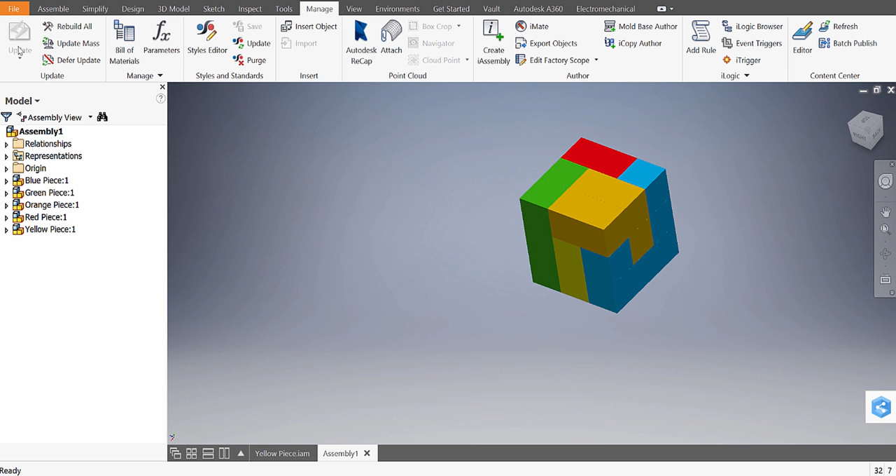The puzzle cube is complete. Hopefully yours is as well. Let's go ahead and move on. We're going to go to File, New, New. We've completed our parts. We've assembled them. Now we're on phase 3. We're going to put them on a drawing file and create some quick orthographics. Go ahead and start with a standard.idw. It's going to open up a file that looks like this.

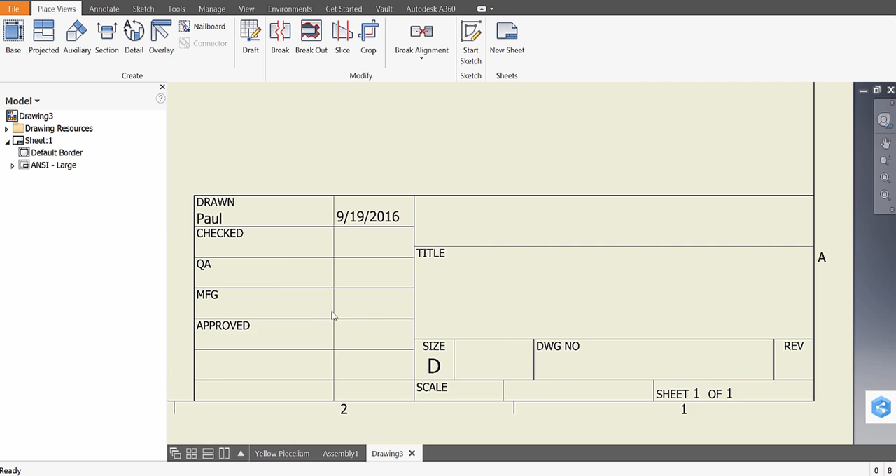I call this sheet of paper a title block, even though the title block is referencing this area down here, which is where you're going to be able to put down some information. It's pretty self-explanatory, and if you want to fill that out, you can. Otherwise, we'll fill that out for another project.

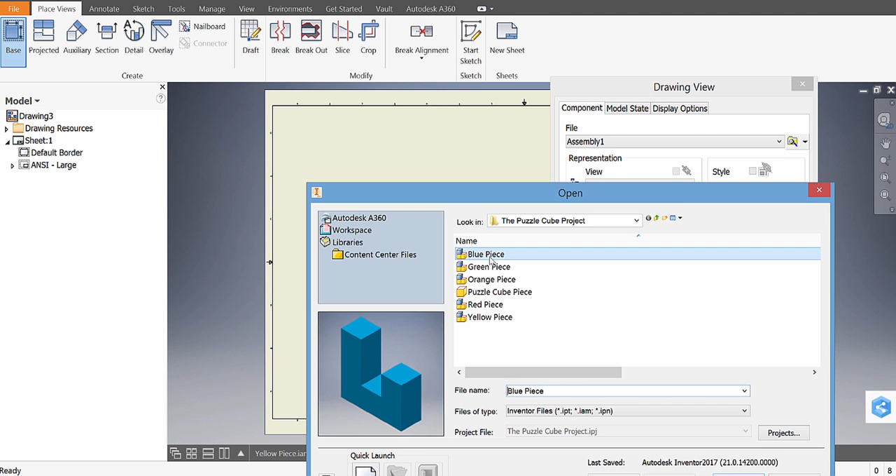What we're going to do is go to Base, and you're going to have a screen like this pop up. I want you to search for one of your pieces. So I clicked on that magnifying glass, and I'm going to start with my blue piece. So I'm going to double click on that. And it should appear on your screen, really small compared to your paper possibly. So if it is small like that, I want you to change the scale of the object from a 1:1 to perhaps a 2:1. That's looking good.

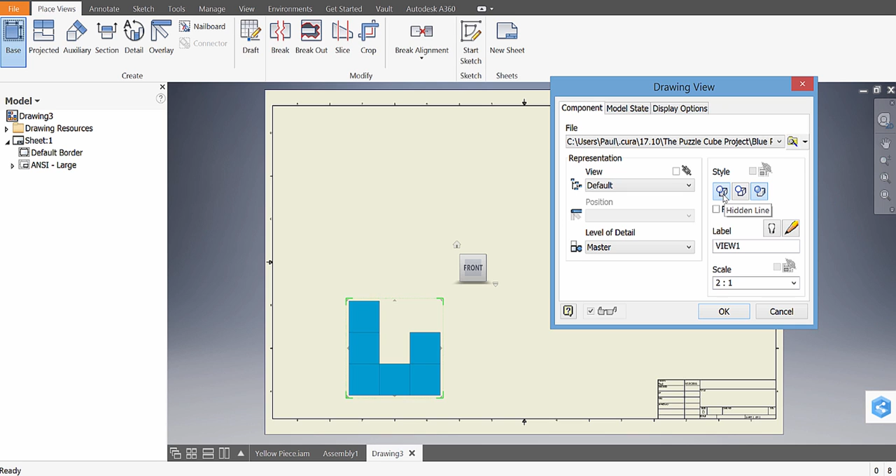I want you to make sure that the object is shaded. So left click on that, and also make sure hidden lines are on. That's just going to show you those dashed lines, and make sure both of these are selected. Okay, I'm going to move this out of the way because it always gets in the way. I'm going to kind of grab this and move it back up here with the left click.

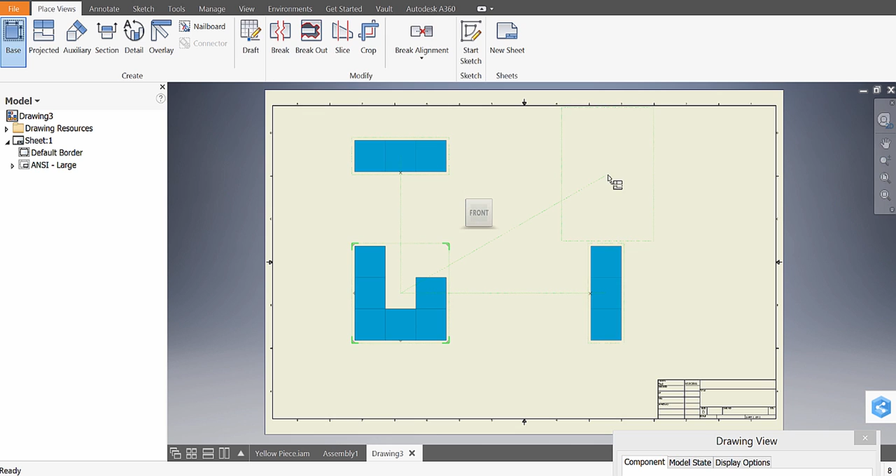And then I'm just going to go up, left click, go back there, go to the side, left click, and then go up here, left click, go to the center, right click, and then click OK. And if you do that in that sequence, you're going to create an orthographic, and not only that, you have an isometric in the corner, and everything is aligned perfectly with the other parts. So that's pretty cool. Typically in the world of orthographics, we also like to dimension things, and we haven't talked a lot about dimensioning, but this will be a good lesson too.

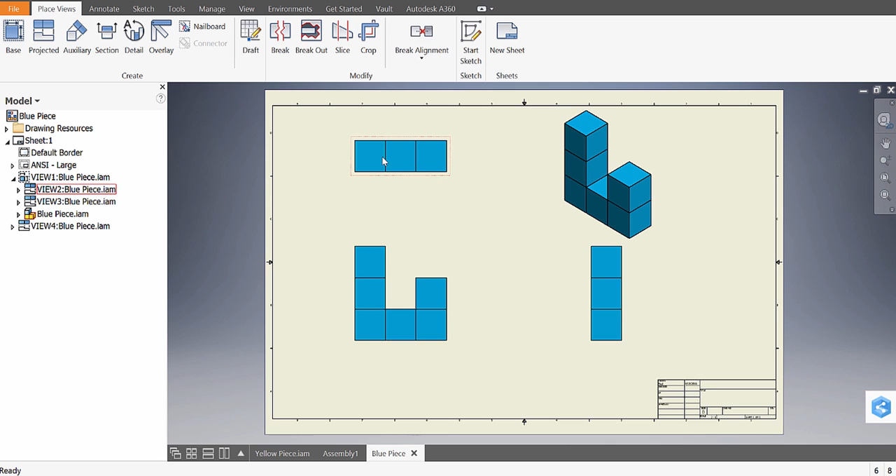Okay, so we need the bare minimum amount of dimensions to fully create this part, even though we assume that each of these are 1 inch. So to do that, and you'll have to think about this in terms of your puzzle cube, I want you to go to Annotate, Dimension, and then think about the dimensions that you'll need. So I need to know what the overall length is. So I'm going to click from, or the overall width, from this line to this line, and I'm going to go up, and I'm going to click once. And it's going to put down the dimension of 3. It's really hard to see, but we need that dimension.

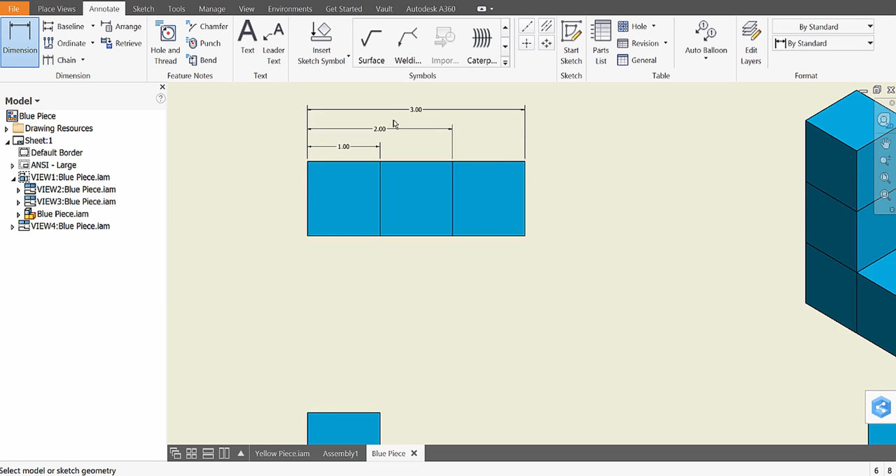Okay, what other dimensions do we need? I guess I need, like, from here to here. I need to know that that would be 2. So I'm going to put that down there. And I guess I need to know that this would be 1. So something like that. So I have 3, 2, 1. Notice how nice that looks. That's a really nice way of setting the dimensions.

Okay, what else do I need to know? I need to know the length of this. So from here to here. I need to know probably these two. So I have that, and I guess I need to know the length of a single block. So I'm going to use the length of a single block like that. Okay, so let me think.

The only dimension I'm missing is the depth of the object. So I'm going to leave this one blank, although if you want to, you could do that. Or I could just click here, there, and hit OK. And now we've created the bare minimum amount of dimensions we need to fully create this part. We know the length of the part, we know the width of the part, we know the depth of the part. So with these dimensions, we can create this object every single time.

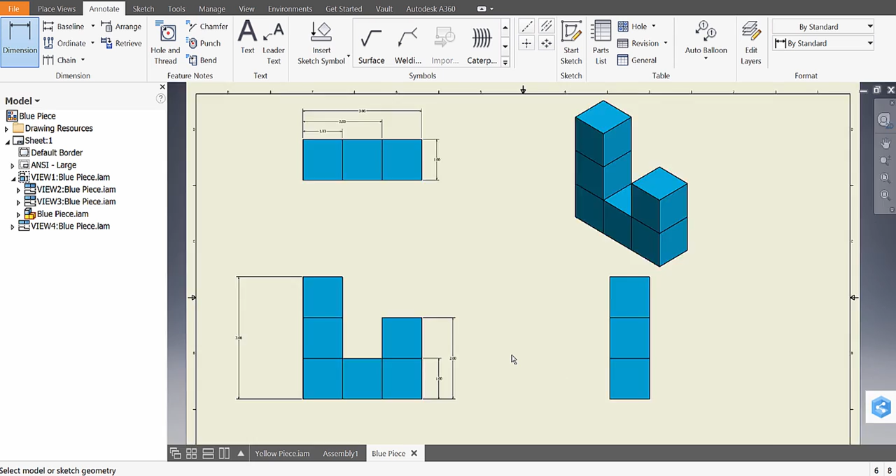Okay, so what I need you to do is for your 5 puzzle pieces, you need to create an orthographic for each of them. And once you've done that, for each of them, go File, Save, and then call it blue piece orthographic, and then hit save, and then move on to the next piece. So I'm going to do a few more pieces.

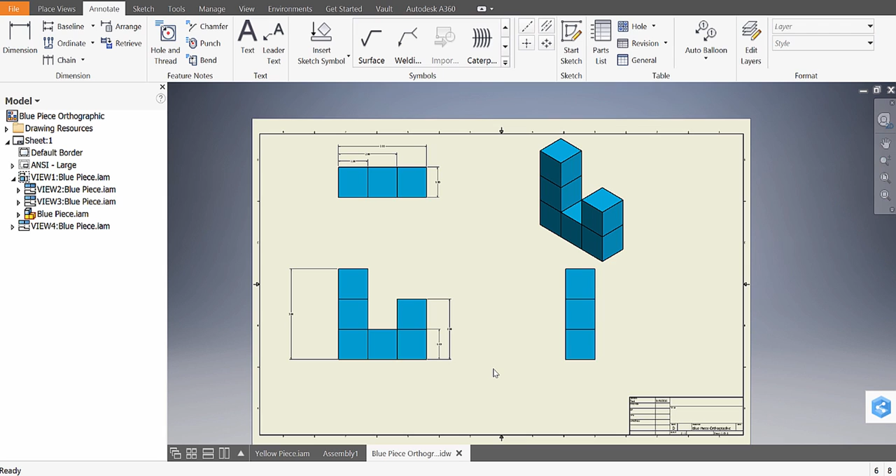When you've completed 1 piece or so, or 2 of yours, you can call me over and ask me if you have all the correct dimensions on it. And I'll take a quick look. I'll tell you if you have it all or if you're missing anything. And once you feel confident about it, then you can continue to move forward with those orthographics.